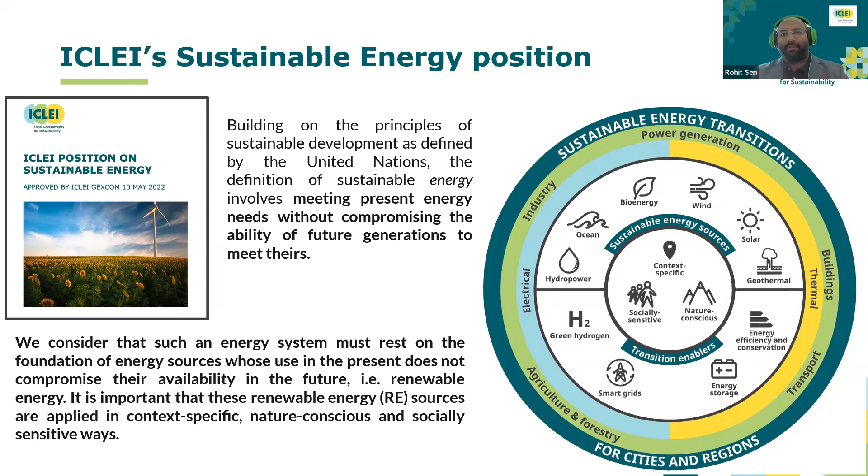We already have seen the sustainable energy is the cornerstone for most of the initiative and activities that is going around for climate change, the climate crisis, whether it is Race to Zero, whether it is talking about the SDGs, whether it is the green recovery, we mentioned net zero emissions, and so on.

It is the most important thing for decarbonizing various sectors. Most of the climate solutions, climate problems have energy in them. So sustainable energy solutions need to be at the heart of the climate solutions.

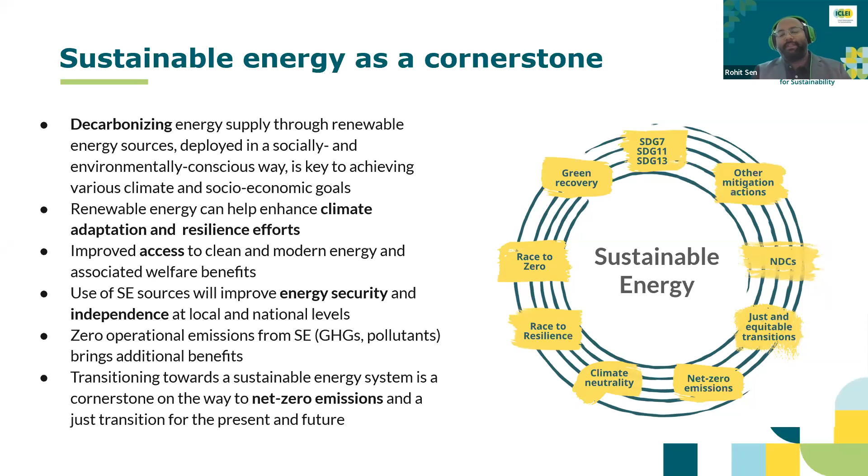We can also see with renewable energy, further climate adaptation and resilient efforts can be made. Moreover, it is bringing in energy security and independence at national and local levels. And not to mention that transitioning towards a sustainable energy system will overall achieve the climate neutrality and net zero emissions that everybody is looking at to achieve by 2050.

Next slide, please. At ICLEI, we are looking at how to achieve this through our climate neutrality framework, which is embedded in the Green Climate Cities program, where we see as the entry point to be the resilience development, then addressing the climate adaptation, resilience, and mitigation through a stepwise customized guide for all cities and regions, which looks into the main 3 steps of analyze, act, and accelerate, which opens up further into 9 steps of how these can be implemented, planned, and further accelerated.

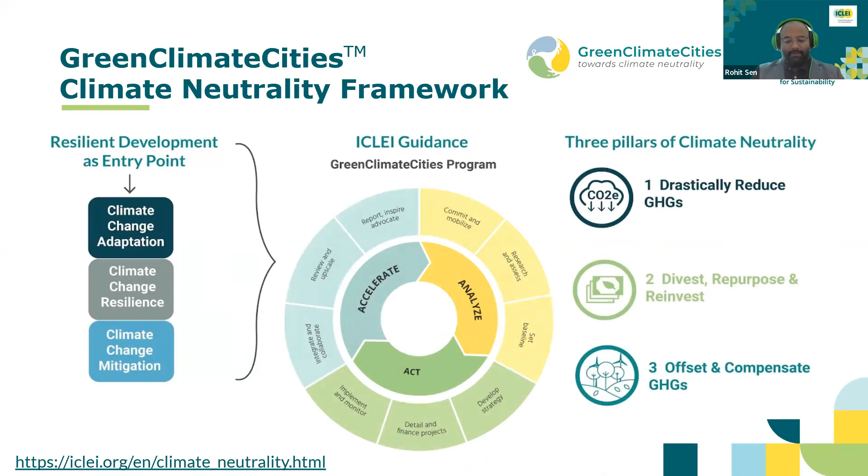The climate neutrality framework further depends on 3 pillars that we have, which is first looking at how drastically greenhouse gases can be reduced, how further divestment and repurpose and reinvestment can happen, and third, offset and compensation of greenhouse gases. Can we go to the next slide, please?

From our perspective, local action is critical, because local governments and municipalities are uniquely positioned to understand what is needed on the ground with local citizens and the population, and can understand the pulse. They are best positioned to look at local targets, whether public transit, building heat and cooling requirements, or energy efficiency codes. They can also support other actors, including national government and stakeholders, in attaining clean energy resilience, enhanced climate action, creating local economy, and helping national and international commitments.

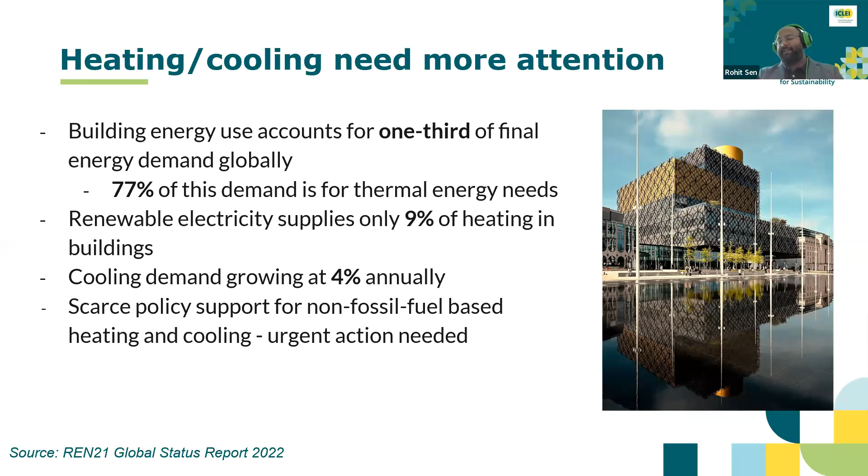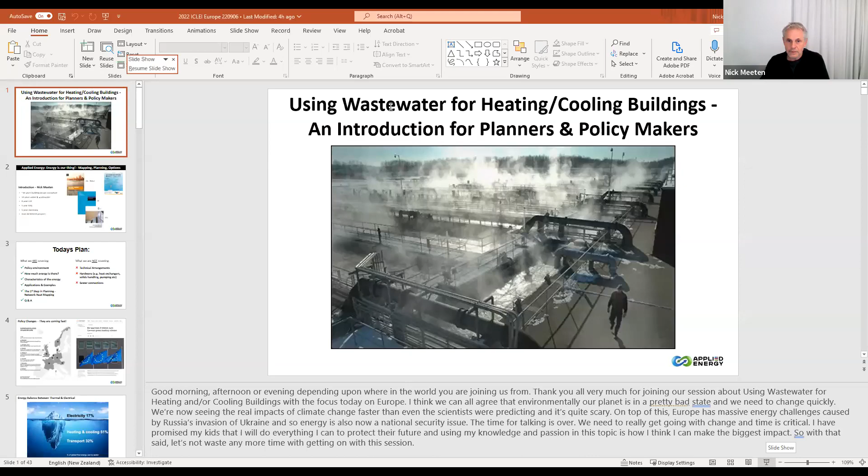I'll just share my screen. All right, wrong screen. Hopefully you can see my screen now. Yes, thank you.

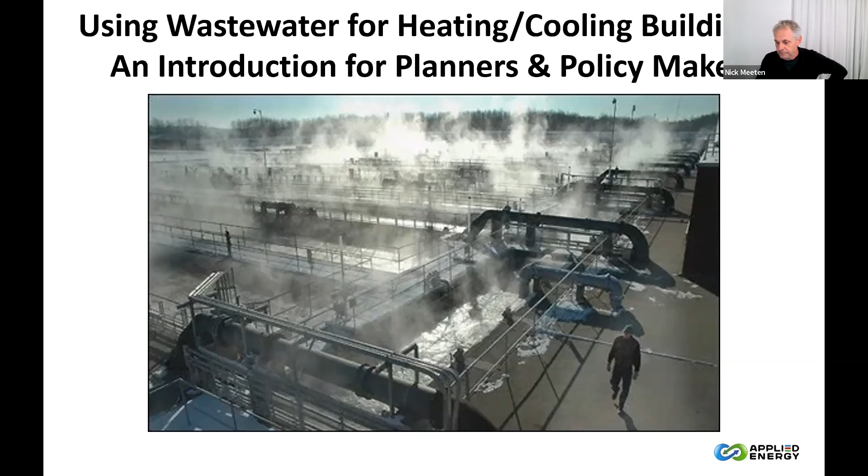Let me introduce myself. I'm a mechanical engineer and I've spent over 25 years designing heating and cooling services for commercial buildings, over 14 years working with water and wastewater, and bringing these different sectors together under the common umbrella of sustainability. I've lived and worked in different parts of the world, including many years in Europe, and I've been involved in over 80 wastewater heat recycling projects worldwide. I'm a director of Applied Energy, a small company specializing in this unusual niche of wastewater heat recycling, and we're very passionate about it.

It's an unusual topic, and there aren't that many people working in this weird little niche. So the plan for today, at least in my presentation, is focusing on planning. It's focused on Europe, but I know there are people in the audience from around the world, so there will be examples from outside Europe as well. We're not going to get into the technical side of things too much, so we won't be talking about pumps, heat exchangers, or heat pumps — we're really focusing on the planning aspects.

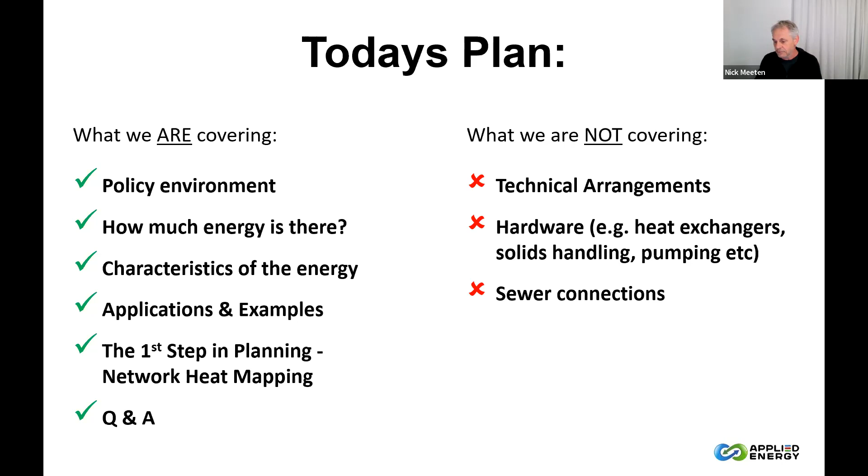So we'll start off talking about policies, and this is a very fast changing space globally. In Europe, new policies are being announced at pretty regular intervals, and sometimes it's quite difficult to keep up. The main trend I see in policies is banning of fossil fuel boilers.

The question then becomes, if you can't heat with gas or oil boilers, where are you going to get the heat from? Other trends are around increasing the share of renewable electricity within electrical grids, and moving to electrification of heat, typically via heat pumps. There's also a policy trend to electrification of other sectors, a very obvious one being transportation, moving towards electric cars, vans, trucks, buses, etc. And with all this electrification going on, there's more competition for electricity, so that's becoming quite an issue.

The last policy I'll mention, specific to Germany, is they've announced 3 billion euros for renewable energy and waste heat-based district heating. They are really encouraging networks to run on 75% renewable energy or waste heat, or for projects decarbonising existing networks. So that's some of the policy stuff I've noticed from Europe.

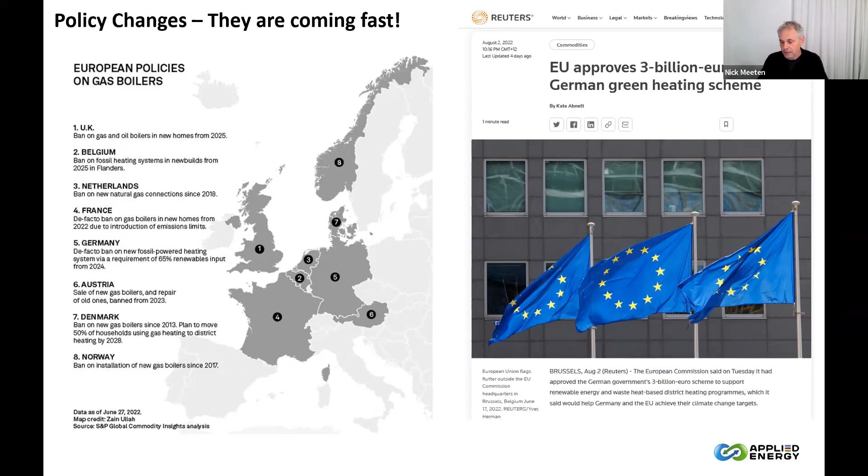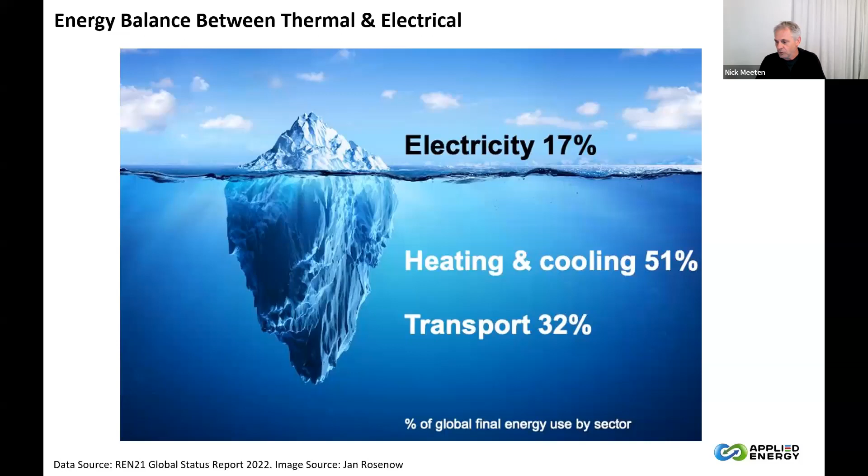Now, if we look at the balance between thermal energy and electrical energy - this is global data from REN21 - we can see that the demand for thermal energy, which is heating and cooling, is actually 3 times greater than the demand for electrical energy. We're talking about 51% versus 17%. And as Rohit mentioned, thermal energy often doesn't get enough attention compared to electricity. I often see on social media people talking about heating and cooling as being the energy elephant in the room. It's really the big one, but it's not getting talked about that much.

If we look at the residential sector within Europe and the energy flows within typical houses - across the EU 27 countries, about 15% of the total energy used in houses gets turned into heat in your water heaters. This is the second largest use of energy in houses after space heating. All this heat energy then flows down into the sewers as the hot water gets used. I'm sure you'll agree that 15% is a lot of energy heading down the drain.

I'd also say this is probably on the low side, because there are other sources of hot water in our houses, such as from cooking - if you boil pasta or vegetables and then drain it, that's hot water going down the drain, but it's not coming from your water heater. Likewise, dishwashers and washing machines often heat water within the appliance, not using hot water from the tank. So all of those heat or hot water sources also go down the drain. So 15% is probably on the low side.

The thing is, heat from space heating gets lost to the atmosphere as it leaks out through the walls, windows, roof and so on. But the heat from hot water is not lost to the atmosphere - it's contained in pipes nicely for us.

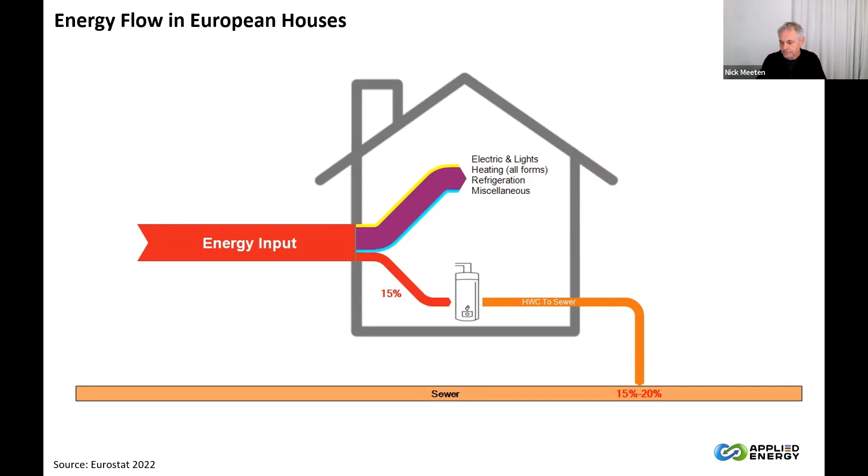If we stand back and look from a wider perspective at a typical city, adding in commercial and industrial low temperature heat on top of the residential sectors, the amount of all this heat that ends up in the wastewater network actually increases to somewhere in the order of 30 to 40%. So in every city, we've got a wastewater network, which is a large collection system of free heat from thousands or tens of thousands, or in bigger cities, hundreds of thousands of houses and apartments, as well as all the commercial and industrial buildings.

Now, of course, this hot water gets mixed with cold water as we use it, we know that. So what we end up with in the wastewater network is a much larger flow of slightly warm water. This water flow contains an enormous amount of thermal capacity for heating and cooling. But unfortunately, currently all of this energy is just wasted and gets flushed away.

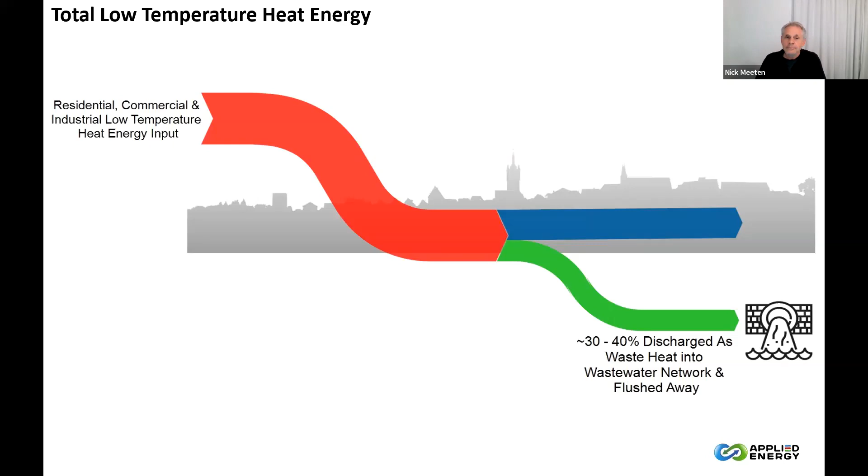So this next map is a filtered version of the one that I just showed you, because this shows, bearing in mind how critical time is, the really easy ones that could be implemented very quickly. This map filters out most of the plants and shows only those already inside or within 2 kilometers of district heating networks. There's still about 4,000 wastewater treatment plants that fit this criteria across Europe.

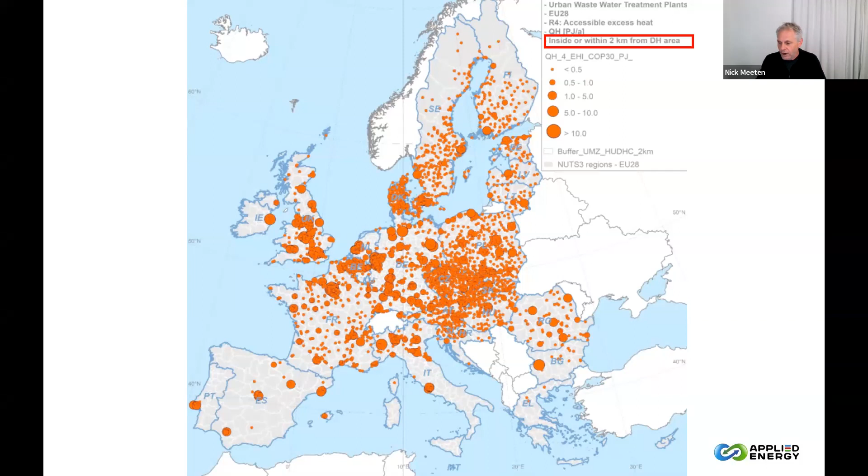And this heat energy is available right now. It's within infrastructure that's already constructed, but it's just being flushed away. These are enormous amounts of energy. The trouble is it's kind of right in front of our eyes, ready to be recycled, but we just don't see it.

So at the moment, we've got all this fantastic heating and/or cooling being flushed away every day in every town and city, but it doesn't need to be. So the idea we're discussing today is just don't waste it. Capture the heat and recycle it while it's still in the city where it's needed.

This thermal energy can be used instead of fossil fuels to heat buildings or industrial processes or for district heating. And so it brings down the carbon emissions. It's also using the wastewater infrastructure for a second and actually higher value purpose than just moving wastewater out of town. It's using the wastewater network as an energy source.

And as the price of other energy sources climbs, which is happening in Europe quite dramatically at the moment, the value of the energy flowing through these wastewater pipes rapidly becomes more valuable as an alternative. Energy can be sold, we all know that. So energy recycling also fits with the concept of a circular economy, which is rapidly becoming adopted as the way forward to become sustainable.

And sometimes these things are overlooked because they're right in front of our eyes. I keep saying that, and that's the case, I think, with wastewater heat. It's right there beneath our feet every day, right where it's needed. We just don't see it. We ignore it and throw it away.

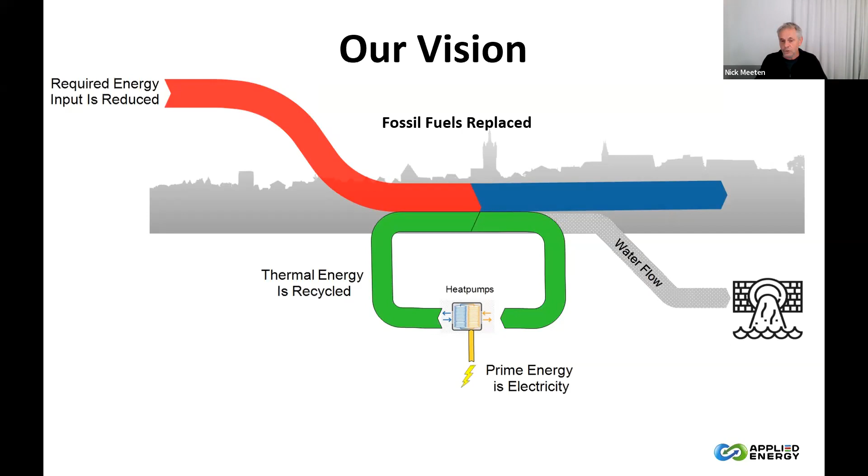So we'll start talking about some of the characteristics of the topic. I'll start off assuming some of you haven't had the pleasure of seeing what flows through wastewater pipes. Wastewater is basically just dirty water. The United Nations officially states that wastewater is 99.9% water. The point is that it's water, and the thermal properties of this fluid are unchanged from clean water.

Its ability to absorb heat, to move heat, to give up heat, are all still the same as clean water. And we know water is a very good conductor of thermal energy, much better than air. So when you're thinking about wastewater, try not to get grossed out. In wastewater we talk about the yuck factor - forget it, get over that. Just think it's water, and the heat is clean heat. Don't worry about the fact that it's wastewater. It's just water, and there's an enormous amount of clean heat energy there.

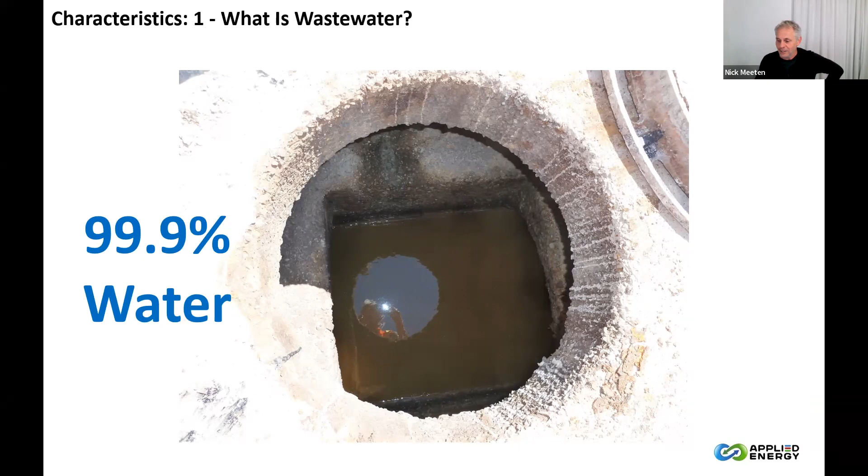What we can see is that the times of day when buildings are occupied and need heating or cooling matches up very well with times of day when there are high flows in the wastewater networks. I like to describe this as saying that wastewater networks and buildings breathe in and out in the same rhythm. That's good for planning because the supply and demand profiles match up. Good stuff, huh?

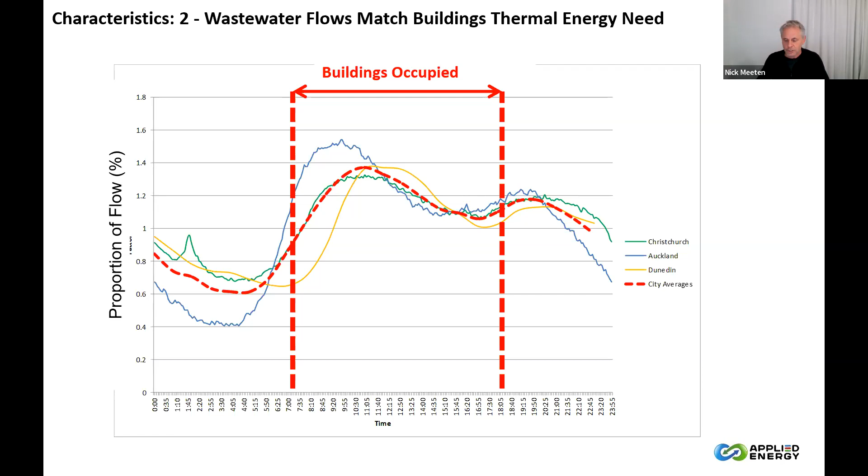Now let's talk about temperatures - another aspect when we're doing planning. This chart shows 20 different temperature data sets for wastewater flows in cities through Europe, the US and New Zealand over all 4 seasons. What we can see is that wastewater temperatures are very stable, relatively neutral. They typically vary within a band of about 8 degrees Celsius over the 4 seasons, and are typically averaging around 14 to 18 degrees Celsius over the whole year.

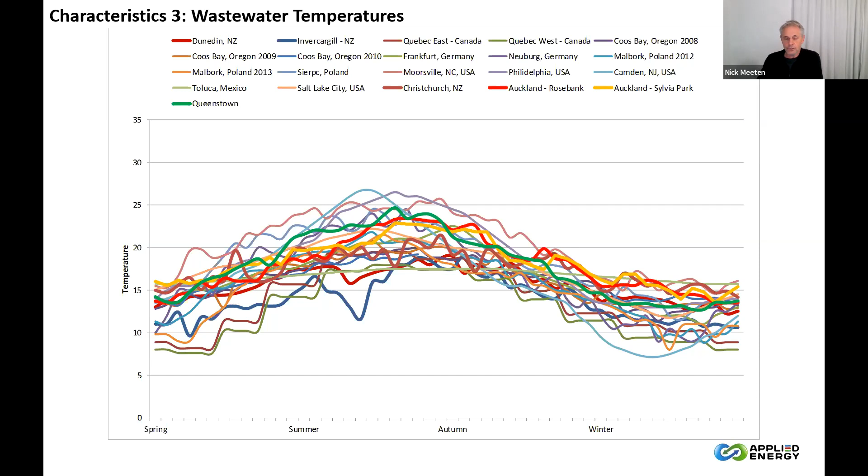That may not sound terribly warm to some people, but when you think that heat pumps can extract heat from air which is minus 10 degrees Celsius, water at 14 to 18 degrees is actually pretty warm. So these temperature ranges are perfect as a thermal source for heat pumps - they work really well.

Right now Europe is just coming out of an extreme summer, and hot weather is just as much of an issue as cold weather will be in the coming winter. Hot weather is driving growth in demand for air conditioning, which typically results in heat being pumped out of buildings and discharged into the air via wet cooling towers or dry air-cooled condensers. In cities, discharging all this heat into the atmosphere increases the urban heat island issue, where the middle of the city is quite a bit warmer than the outskirts. You end up with this heat bubble in the city, which drives demand for even more air conditioning - a growing cycle.

Wet cooling towers consume quite a lot of water, which in times of drought - another issue Europe is having right now - could be used for other purposes. All these cooling methods, wet cooling towers or condensers, use fans to move air. Fans are noisy, so as more fan-powered coolers get installed, noise pollution also grows rapidly.

This slide shows modeling of the impact of air conditioning on the urban heat island profile in Paris, done about 10 years ago. At that time, the thought of twice as much air conditioning being installed as predicted probably seemed like a fantasy. But given the heat waves Europe has had recently, it actually seems pretty probable now. So wastewater offers an alternative place to pump some of that heat instead of into the air.

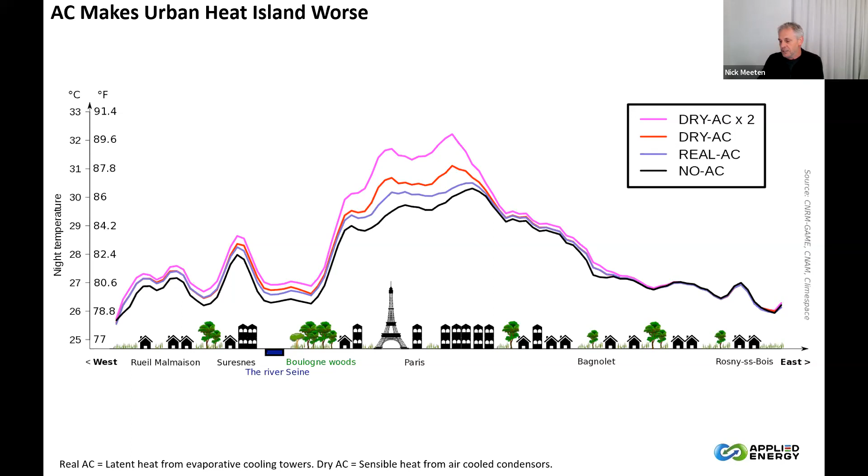What are the benefits? You get water savings from not using wet cooling towers. You can get a quieter city, reductions in urban heat island impacts, and energy savings.

So talking now about temperatures again, this is a comparison between wastewater temperatures and air temperatures. This data is from the city of Christchurch in New Zealand, and Christchurch has a climate which is statistically 97% the same as Paris, 96% the same as Brussels. So not very dissimilar, and the principles I'll show you here apply to most cities within temperate climate zones.

Firstly, you can see how stable the wastewater temperatures are, that's the red line. And that in winter, wastewater is much warmer than air. Equally, in summer, wastewater is cooler than air.

And this predictability and stability around temperatures and flows that I've shown over the last few slides are fantastic qualities for planning. And so they make wastewater really an excellent thermal source for heat pumps, for both heating and cooling. That's why I wanted to show this slide, heating and cooling. It allows heat pumps to operate at very high efficiencies, which means you can heat and or cool a building without burning fossil fuels and using less electricity than air source heat pumps. And that's the win, okay? That's the nub of why we're here. Electrification of heating with very high efficiency with electricity.

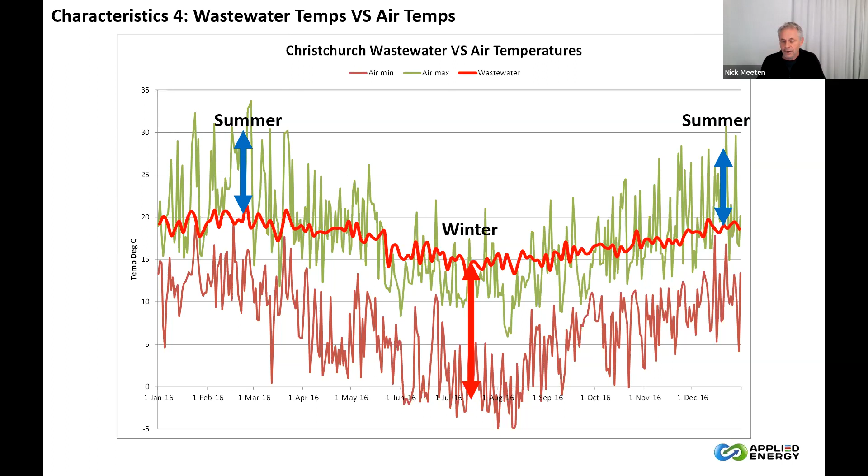So I just wanted to show a case study from the US around electrification of heating. This building is in Atlanta, in Georgia. It's the office building of ASHRAE, which is the American Society of Heating, Refrigerating and Air-Conditioning Engineers. So for heating and cooling guys like me, this is kind of the headquarters of Geekland.

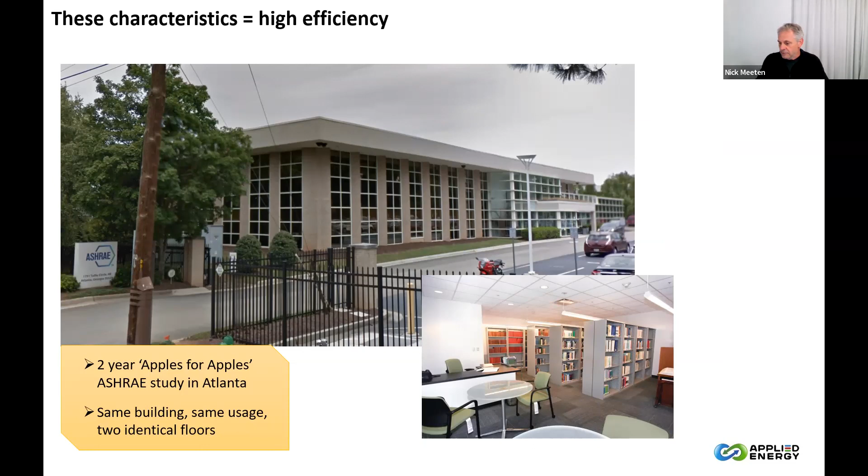It's a pretty standard 2-level office building, you can see that. And some years ago, they decided to refurbish it. As part of this refurb project, they wanted to use their own office as a living lab. So they installed an air source heat pump system on one level and a groundwater source heat pump system on the other level. They installed lots of data loggers, sensors, electrical meters, etc., to monitor everything that was happening. And they operated it for 2 years, gathered together all of this data and analyzed it.

And what they found is that the ground source heat pump system used half of the electricity as the air-based system. So if you're using half of the electricity to do the same thermal job, that makes it twice as efficient. So that's the sort of efficiency gains we're talking about.

Now, admittedly, this one was using groundwater instead of wastewater, but groundwater and wastewater are both very stable in temperature over the whole year. And we know that ambient air is always heading in the opposite direction to what your heating and cooling needs are. So by that, I mean in winter, when you need heating the most, the ambient air is the coldest. But with an air-based system, that's exactly where you're trying to drag heat out of. And likewise in summer, when you need cooling the most, the ambient air is the warmest. And with an air-based system, this is exactly where you're trying to push heat into.

So you're always fighting against nature. And with a stable and relatively neutral thermal source like wastewater or groundwater, you're not fighting nature so much. So you don't have to work as hard, and so the efficiency is higher. And this is why you need less electricity to do the same thermal job.

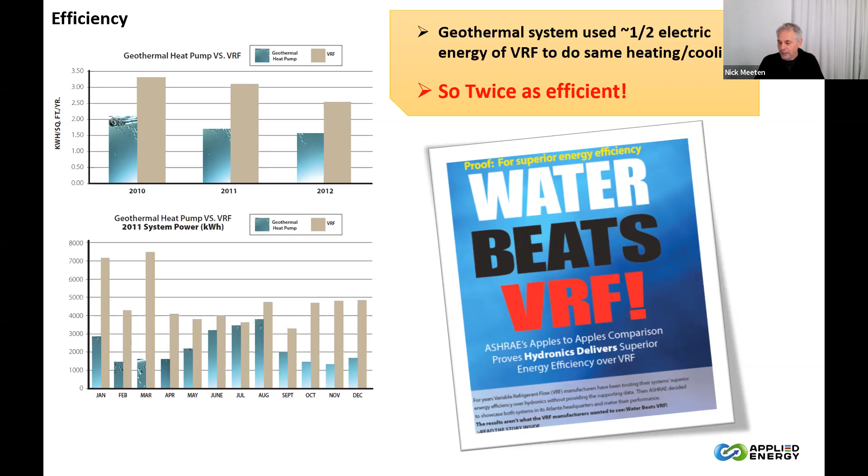Now, while this ASHRAE study is not comparing air source with wastewater source, since wastewater has very similar temperature profiles to groundwater, except that it's warmer due to the hot water energy included, compared to a groundwater source system, wastewater will get better efficiencies in heating mode, but slightly worse efficiencies in cooling mode. But overall, both wastewater and groundwater are much better thermal sources than air source. And wastewater is already in the pipes. One of the things about water sources is you don't need to worry about contaminating wastewater because, as we know, it's already dirty.

Now I want to focus specifically on a specific type of building, which is swimming pool centres. Why? Because these types of facilities are huge consumers of low-grade heat. Even in summer, they need heat. And for many cities, swimming pool centres are one of their biggest energy costs.

Now, hopefully you'll agree that's pretty impressive. I'm not saying we can take this one single example as guaranteeing that sort of performance for all of them. We do have other performance reports from aquatic centres in France, which use wastewater heat, and they tell us that the average coefficient of performance of their heat pumps over 12 months is in the range of 5 to 7. So it is pretty impressive.

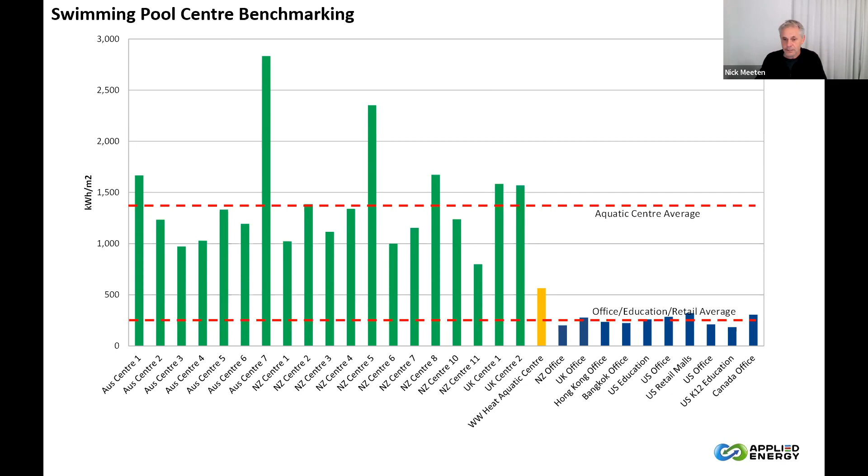Typically public institutions like city authorities often don't want to be the first ones to try something because it might be risky. So the first wastewater heat recycling systems were installed in Europe, actually starting in Switzerland about 30 years ago. My estimate is that there's probably about 1,000 systems in operation around the world.

So these technologies are now starting to become pretty mature. The adoption of them is starting to spread, but from our experience it's generally poorly planned. That's why we're talking about planning today. It's often done, a building here and a building there, but no real plan, and so the best value for money is not being realized.

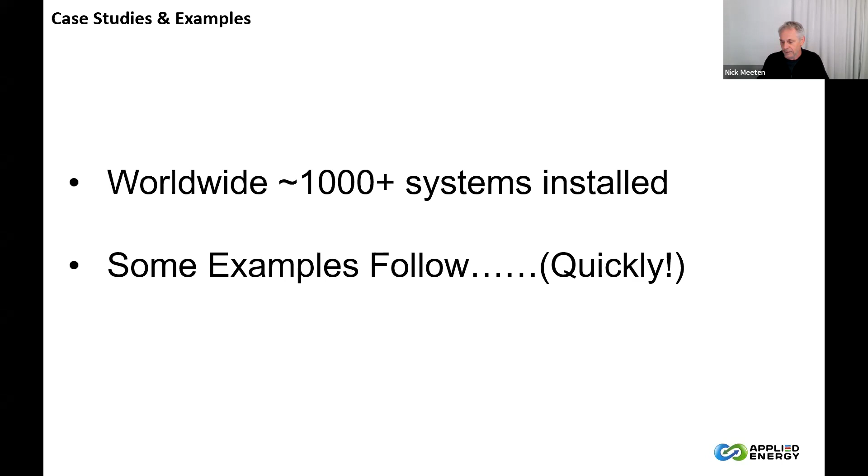So what I want to do now is have a very quick look at a few examples of wastewater heat recycling installations, which I've chosen to span a range of building types, just to give you a feel for where these systems are used. I haven't picked all the fancy ones or the most impressive ones - some of them are really quite ordinary buildings. I will run through these quite quickly, not dwelling on them too long, just to give you a feel for some of the applications in use.

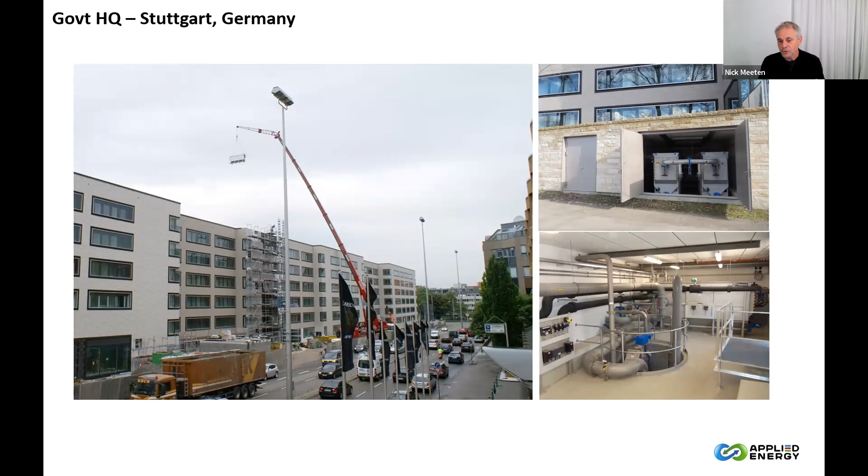So these are clean installations. There's no risk of sewage running all over your floors. We're not pumping sewage through any buildings. It's not dirty and smelly. So there's nothing to be afraid of.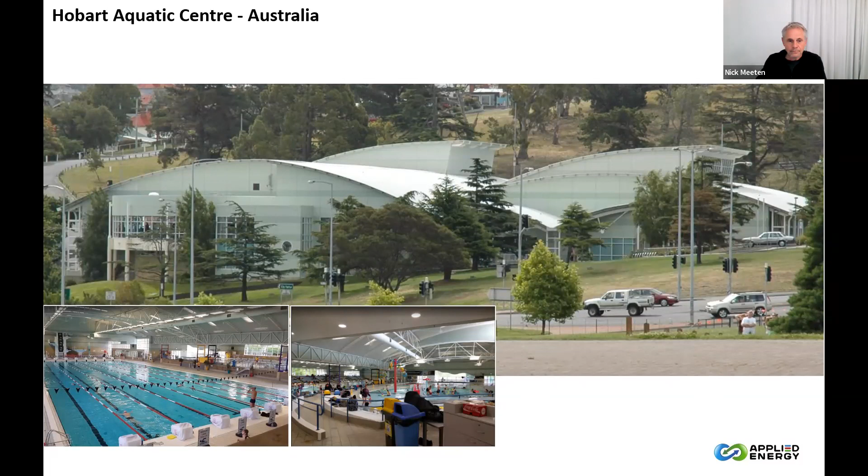Here's a selection of swimming pool centres that are all using wastewater heat recycling. 3 of them are in France - 2 in Paris, 1 in Marseille.

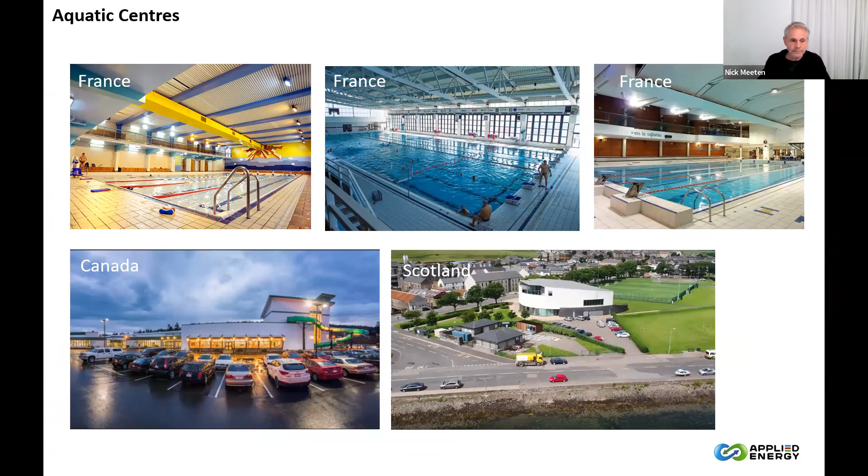Here's one from Vancouver in Canada, called the Southeast False Creek project. This has been in operation since 2010. It's a district heating network with wastewater providing about 80% of the heating. What they've done is tap into a large sewer, which runs across the bridge in the top left corner of the picture there. The red buildings show customers currently connected to the district heating network, with about 3.2 megawatts capacity in that network at the moment.

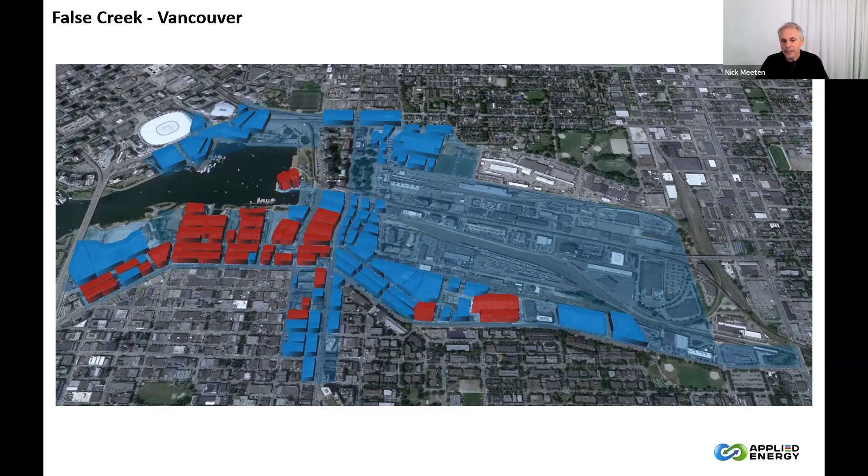The blue buildings indicate future customers who will connect once a 6.6 megawatt thermal expansion project is complete.

This is in the town of Straubing in Germany. 4 pretty ordinary little apartment buildings, which are providing 102 municipality-supplied apartments for elderly people. They're all being heated with wastewater heat. It's been running since 2010.

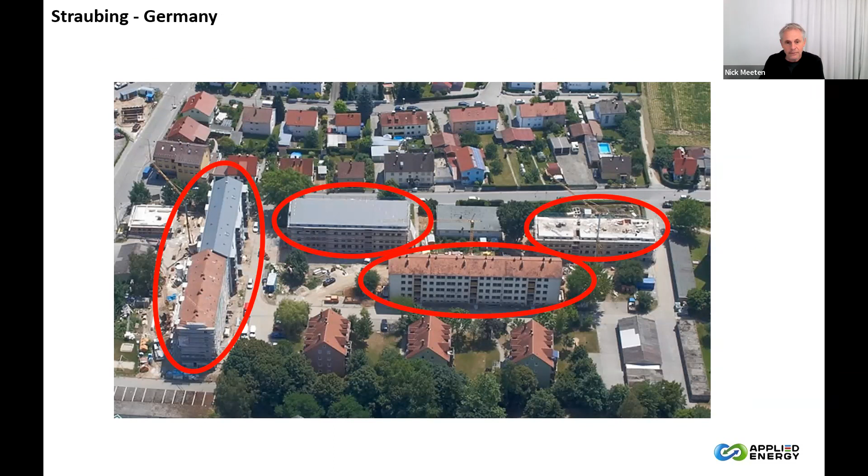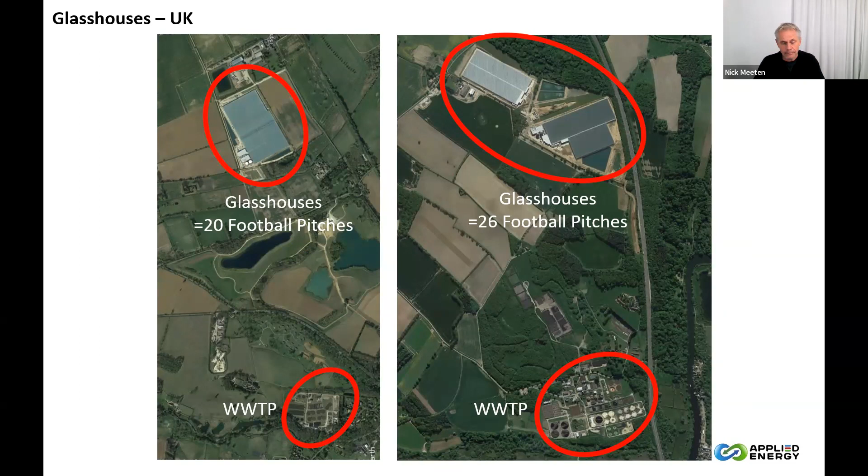Now, this is an interesting one for me. It's from the UK, and there are 2 sites here where commercial glass houses have been deliberately constructed close to the wastewater treatment plants so they can recycle the heat from the wastewater via heat pumps for low carbon heating of the glass houses. And I find this interesting because often the land around wastewater treatment plants is very lowly valued, often because there might be a bit of odor associated with it. But in the future, I think this might start to change when people see uses like this and the thermal energy that's available at wastewater treatment plants.

Hospitals are an excellent match for wastewater heat recycling because they also need a lot of low-grade heat pretty much all year round. This one is in Budapest in Hungary.

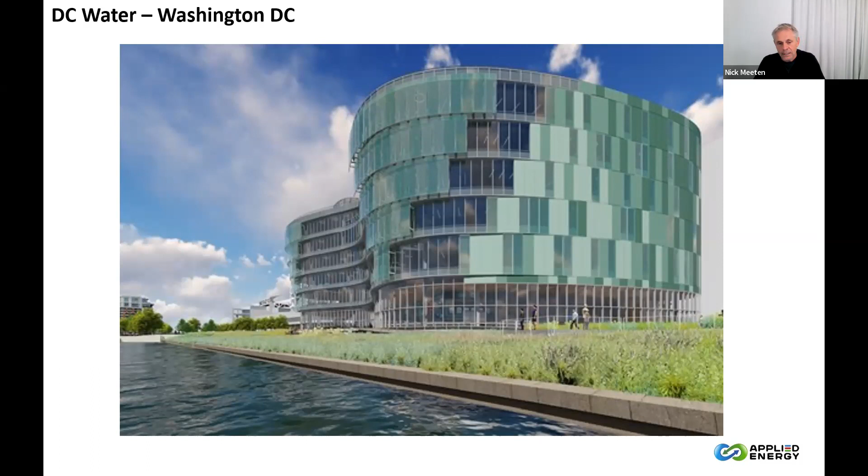Here's one from Washington, DC in the States. It's the headquarters for DC Water. This has been in operation since 2018. It's LEED Platinum. When they were designing this building, they looked at 3 different ways to provide the heating and cooling: one was a conventional air-based system, one was wastewater heat recycling, and the other one was geothermal. They estimated the costs at $700,000 for the conventional system, $840,000 for wastewater heat recycling, $1.4 million for geothermal. And when they factored in the efficiency gains, they said it was an absolute no-brainer to go for the wastewater heat recycling system.

This one's also from Budapest. It's a mixed-use facility comprising retail, hospitality, performing arts, and their municipal council offices using wastewater heat recycling.

One from Japan. I don't know much about this at all. It's been in operation since 1994, and it's a 21-hectare area servicing office buildings, hotels, and commercial facilities via a district heating network.

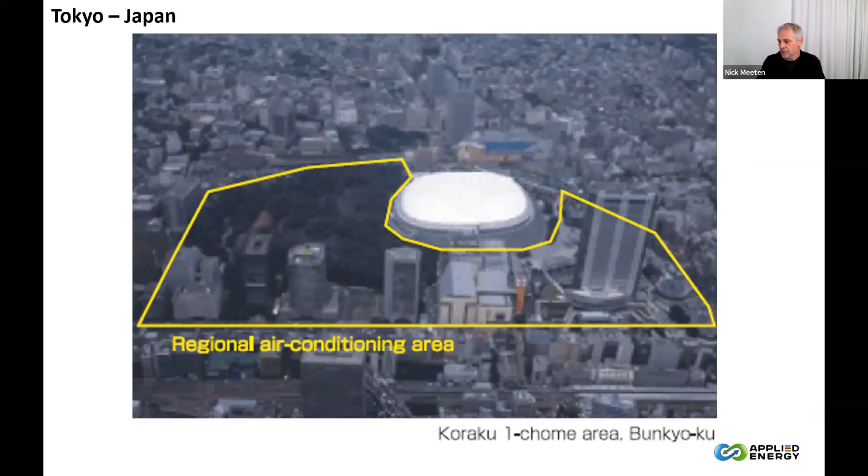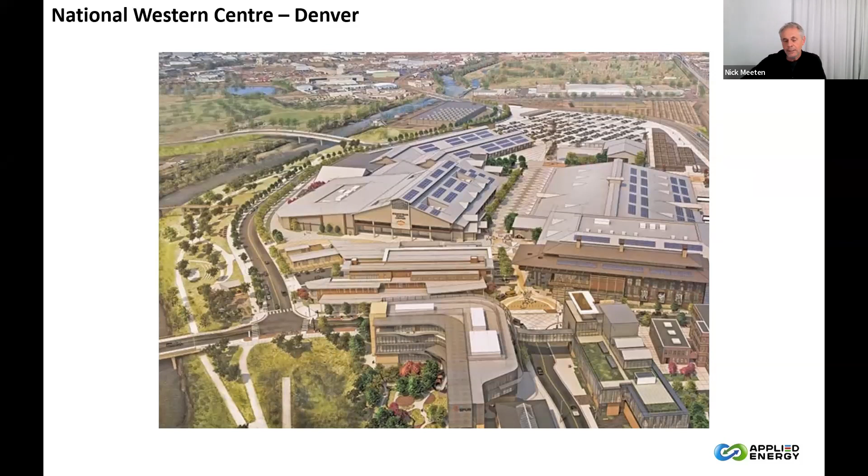Another one from the States. This is in Denver. It's currently in the construction phase, and the wastewater heat recycling system will supply a district heating cooling network for the whole campus of buildings that you can see there. The wastewater heat recycling energy centre is actually finished. It was completed in April, became operational. It's got a 4 megawatt thermal capacity. Another hospital in Toronto, construction of that one has just started last month. When it's completed, it's going to be one of the biggest ones in the world with a 17 megawatt thermal capacity.

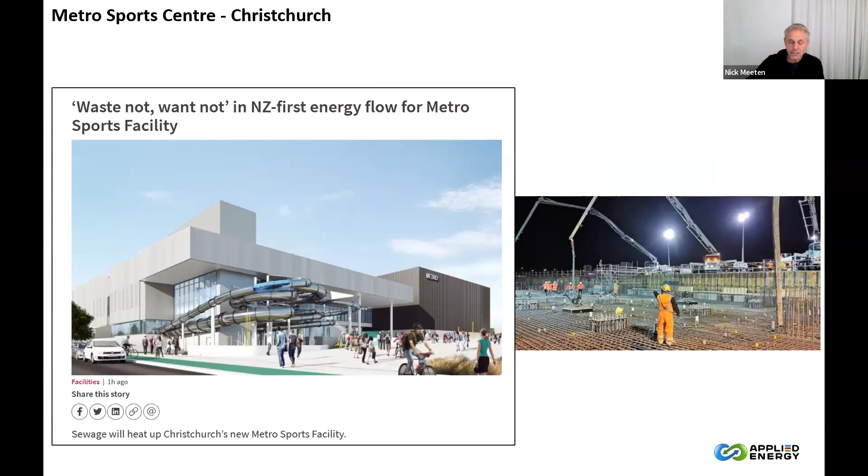Here's one here in New Zealand. It's our first one in construction right now. It's due to be operational in about 6 months. It's a large aquatic centre with a 3.5 megawatt thermal capacity.

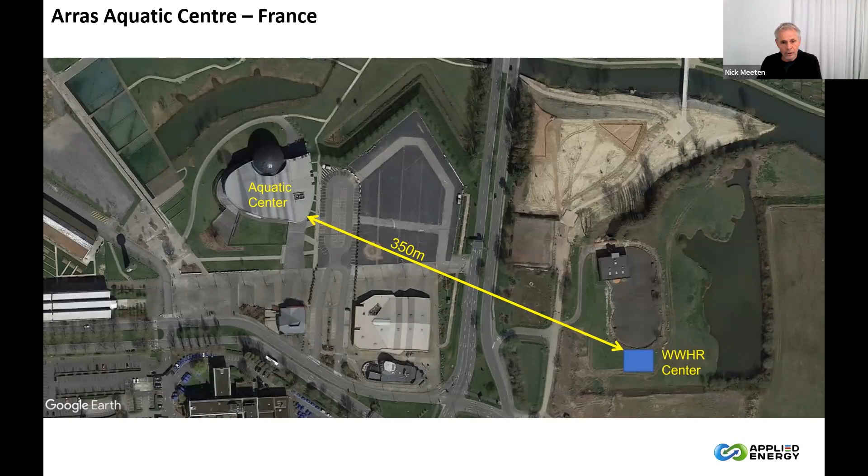Just to give you a feel for sometimes when things are not located directly beside each other, here's an aquatic centre in France. The wastewater pipe is 350 metres away from the building, but that's no problem. They've got the wastewater heat recycling centre there where the blue box is, and run some pipes over to the building. And a similar one in Canada, where they've got the Panorama Recreation Centre there on the left side.

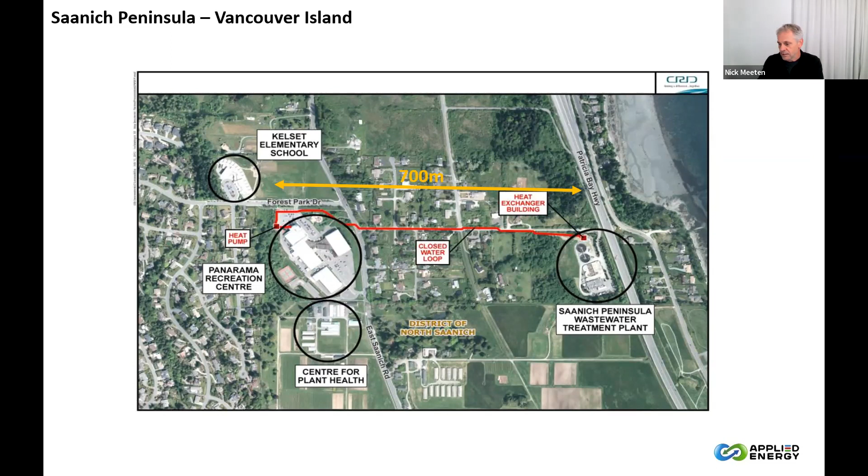The wastewater treatment plant is 700 metres away. They've put heat exchangers at the treatment plant. They've got a closed water loop over to the building with heat pumps there. And they've designed that system to allow for future expansion upwards to the school, just to the north there, and just to the south of the aquatic centre to like an industrial site there. So that will, I guess, eventually have a little precinct scale district energy system.

In Scotland, there's a whole business park here that uses wastewater for heating and cooling.

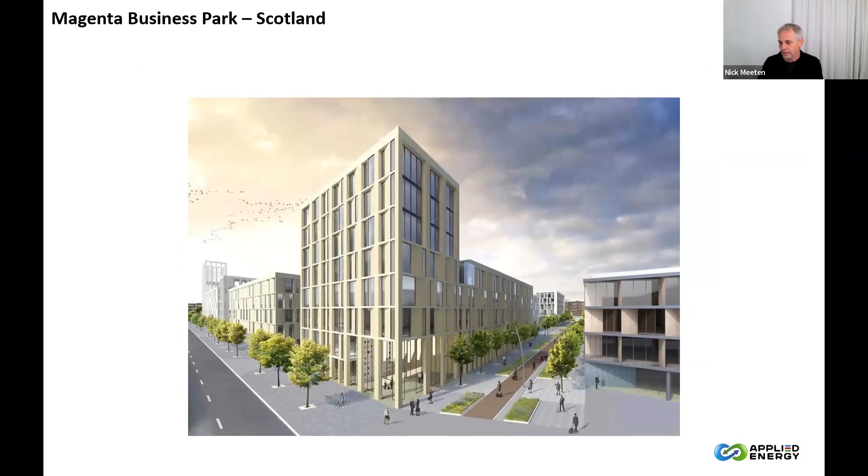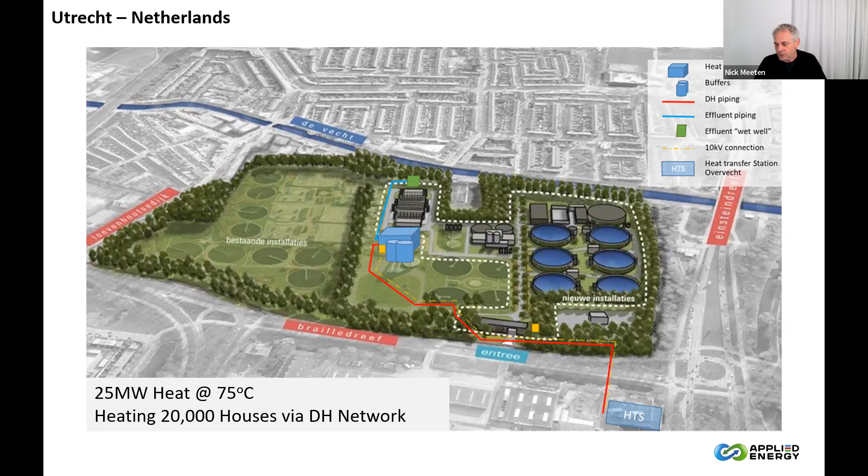I want to also add that district heating networks can also be supplied with wastewater heat from within the wastewater network. It's not always necessary to go to the end of the network at the wastewater treatment plant, but to allow these sorts of things to be planned, the information is needed.

So that's where I want to really start talking about the planning part of it, because that's the focus of today. As I mentioned earlier, our experience is that wastewater heat recycling is generally done in an unplanned way, rather than a city having a plan on how to use this resource. So if we want to start talking about where do we start, if a city is interested, where do they start?

The first step is to actually make this thermal energy visible, because when it's running through the pipes, it's just invisible. Once it's visible, then planners can start to include it in their plans. And we should remember that this heating and cooling source is running right through the city, exactly where it's needed.

Once the mapping's done, ideally the information is made freely available to anyone. And when I say freely available, and this is my personal view, that means something like online. It's not guarded by some city official, because we should remember that the people of the city are donating this energy into the wastewater network every day for free. And I believe that city authorities actually have a moral obligation to their community to make this resource visible.

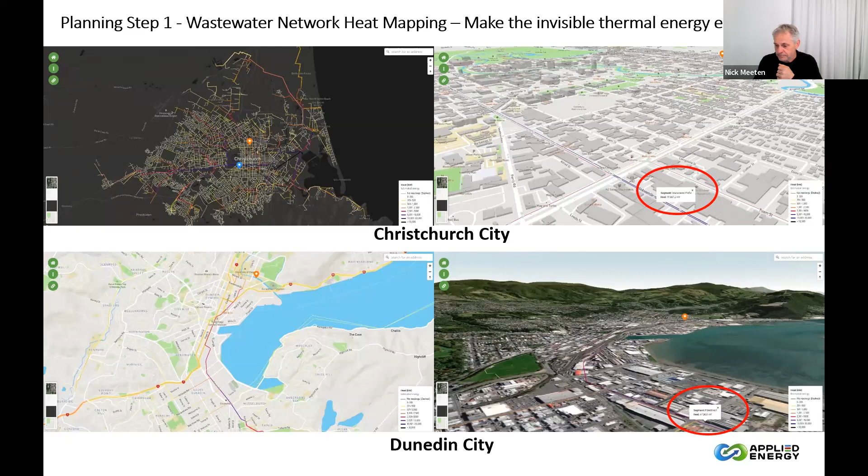So this is the starting point for planning. And this heat mapping service, of course, is a service we can offer. We've done full wastewater network heat mapping studies for 4 cities, and we've done 7 partial heat mapping projects in other cities. So we've got this expertise and the processes and the technology well established now, and this is available to assist any other cities that want it.

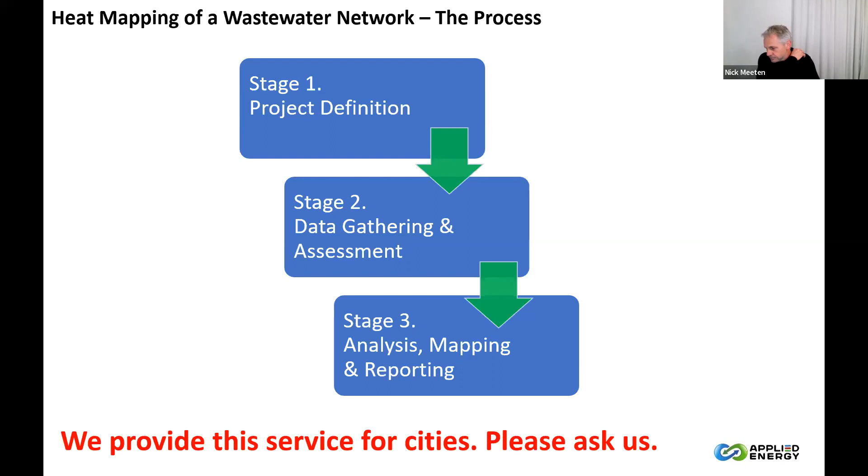Here's an overview of our process. It's a 3-stage process as set out here. Stage 1 takes about 10% of the work. Stage 2 takes about 50% of the work, and stage 3 takes the remaining 40% of the work. So as I mentioned, we've learned how to do this by doing it a number of times now. So we can do it quite efficiently for cities, not only in Europe, but in other parts of the world.

Where does that data come from? So we have to document the criteria that's been used, the assumptions that are made, the risk assessments that are made, the thresholds that are established, because wastewater networks are not an inexhaustible source of energy. They've got a huge capacity, but there are limits. So we have to establish what those limits are.

And the deliverables, apart from all the written stuff, there was also a full map atlas of 25 maps that covered the whole city. As part of our process when we're doing these studies, we can take into account things like where there's urban growth planned, where there might be commercial or industrial developments planned.

We have to look at what treatment processes are used at the wastewater treatment plant, and establish therefore what thresholds there are for taking heat out of or adding heat into the network. But also when we're doing these sorts of things, we identify where there are likely to be very good opportunities for wastewater heat recycling.

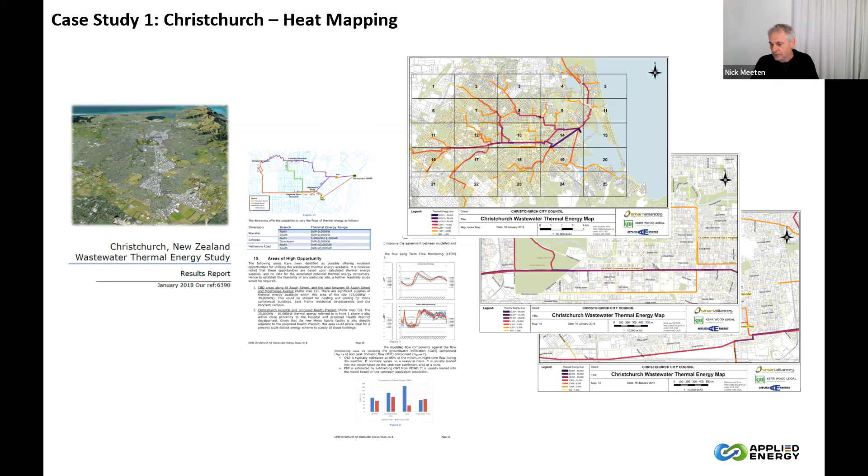In Christchurch, we identified 11 potential sites which would be really highly feasible. Since we did this report, other sites have also come along, but this type of integration into the planning can only happen once the information is available for people to use.

Here's some examples from two other cities where we've done the heat mapping services, Nelson and Dunedin. Now that they've got this information available, it's been incorporated into planning for things like heating and cooling energy options for swimming pools, airport hangars, buildings, schools, university campuses, and commercial offices. It's only because they've got the information available that they can integrate it into their planning. So if you make this invisible energy visible, wonderful things can happen.

So I said before, Applied Energy, we're a small company, but we are part of a global network called the Heat Academy, which is actually headed out of Sweden by Mr. Peter Underberg, who is hopefully watching this event today. So hello, Peter. This network that we're part of, we've got people in 28 locations around the world, most of whom are actually in Europe. So we're here and we want to help.

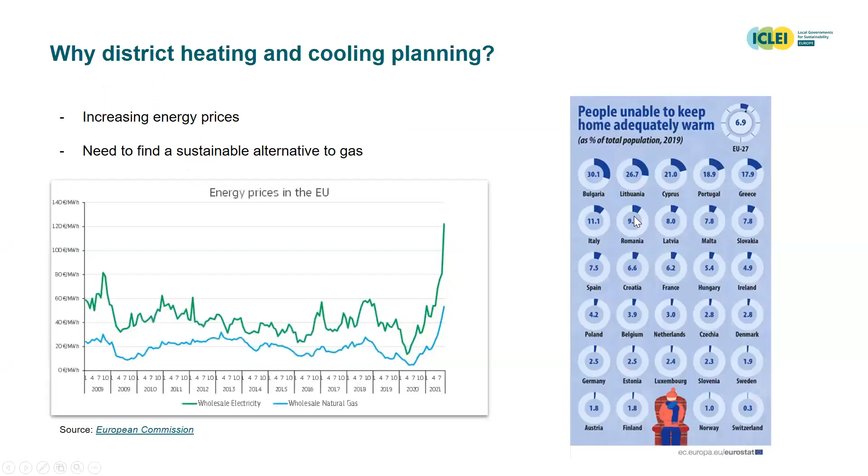Then, I will move directly to why is district heating and cooling planning so important currently in Europe. Well, first of all, as you already mentioned in your presentations before, the increasing energy prices are an issue that we have been tackling within the last couple of years. Prices are rising a lot, and this is not expected to go down any soon. We also have to find a sustainable alternative to the Russian gas after the war that we are having in Ukraine because of the Russian invasion.

Additionally, if we look at some numbers of 2019, the people unable to keep their homes adequately warm in the EU was about 7%, and these numbers are only getting worse with the current situation. Therefore, I would say that this is the perfect time for taking action right now into thermal energy planning because of the high awareness of citizens on the one hand, because of the energy prices, also the sense of urgency and solidarity we have right now with the situation that we are living. So rapid action is definitely needed in Europe.

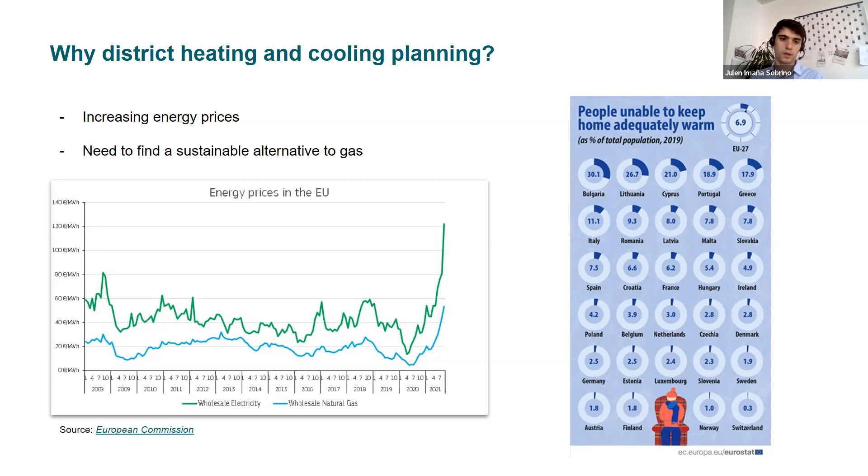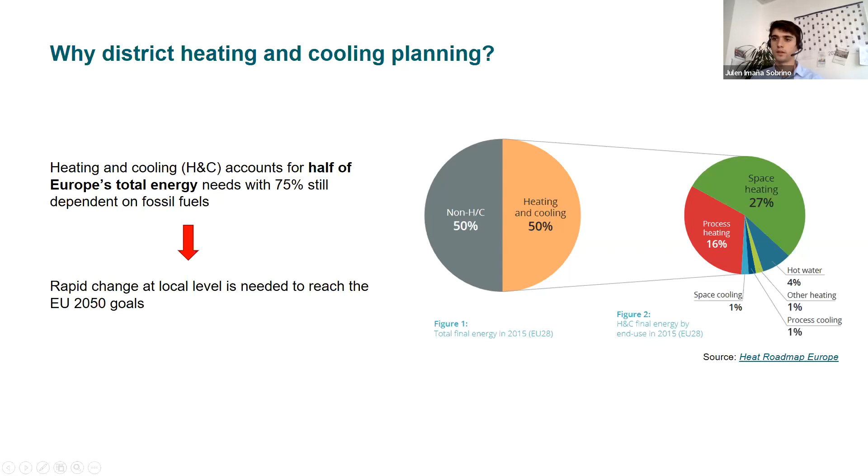You might also know what the Covenant of Mayors is. This is a movement for local climate and energy actions across Europe. They help local authorities develop sustainable energy and climate action plans, also local green deals.

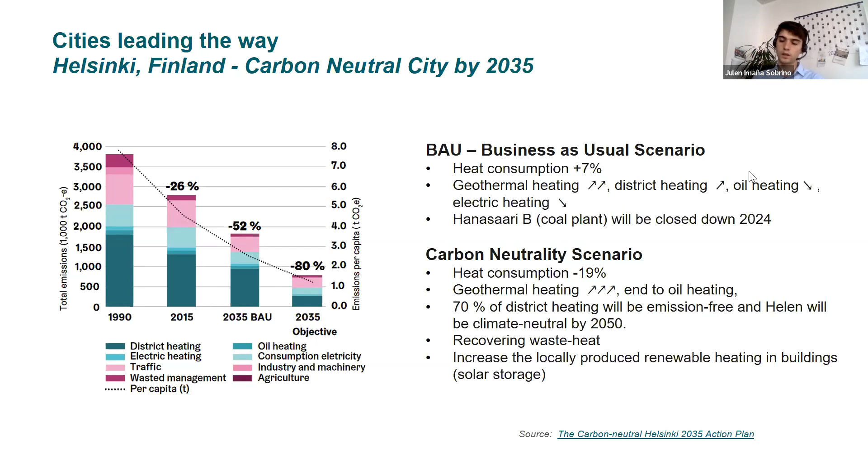If we look at the more ambitious carbon neutrality scenario, they expect to actually reduce, not increase, heat consumption, by 19%, and increase a lot of the geothermal heating. What's very interesting is they want 70% of district heating to be emission-free in the city.

If we see another city in Europe, like Mannheim in Germany, this city wants to be carbon neutral by 2030, even earlier. In their climate action plan they have several goals; first is to decarbonize their district heating system. They currently supply this system 60% with hard coal from a nearby power plant, and want by 2030 to replace this heat supply with river heat, geothermal, and biomass sources.

As you can see, cities are doing very interesting work trying to find innovative and alternative heat sources. And of course, wastewater heat could be a very good option for many of these cities.

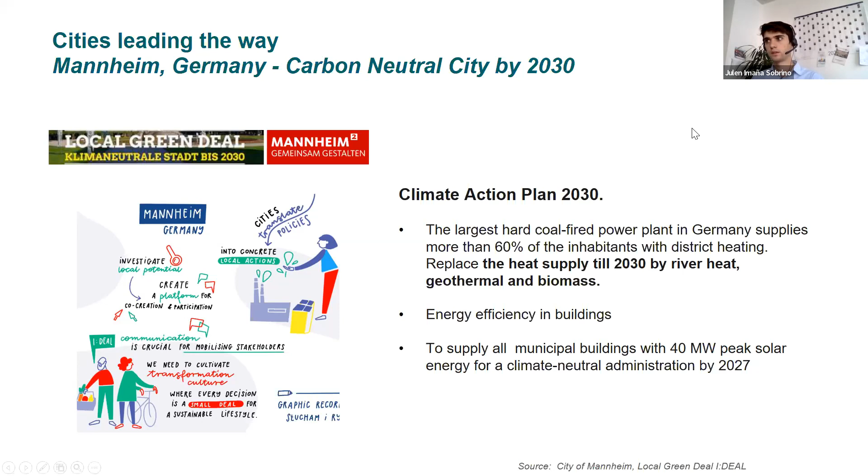The focus of this project was on waste heat for district heating, and they developed several roadmaps giving tips for decarbonization of the heating and cooling sector. Very useful—you can go check it on their website.

We also have the Thermos tool, a project which developed a tool with the same name, Thermos, a free web-based software that can be used for energy planning. This tool can help us design district heating or cooling networks in our city in a very user-friendly way. It can create different network solutions instantly, and I will explain it further later.

We also have the Keep Warm project. This project wanted to accelerate cost-effective investment in the modernization of district heating systems. They developed recommendations for national and local authorities on how to retrofit district heating, and a guidance booklet on how to improve district heating networks. I encourage you to go check it on their website.

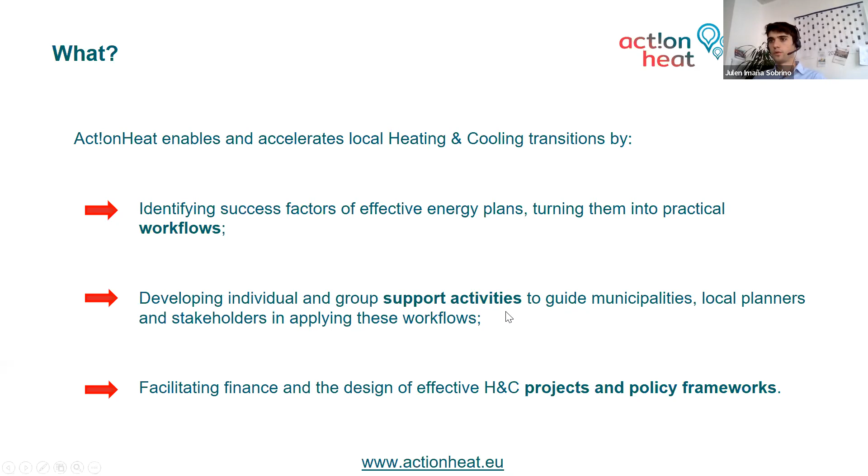As I told you, we are rolling out a support facility in ActionHeat. This support facility aims to support 120 municipalities during the project lifetime. We already started with the first round this year, and we want to help municipalities start, continue, or improve their heating and cooling plans. We also want to focus on 30 pre-feasibility studies for some of these individual projects, and 15 of the projects can benefit from additional performance and financial analysis.

So we encourage all the municipalities across Europe to apply for this opportunity. The call for applications will be open at the end of September this month. You can stay tuned or go to the website and fill in the expression of interest, and we will contact you whenever the call opens again.

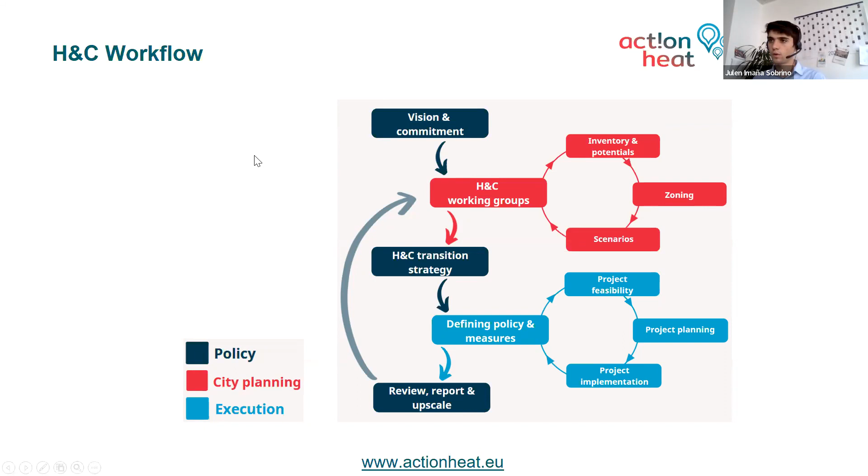Going through the specific steps of this workflow, we start with the vision. This is the first step for decision makers in the municipality to develop a vision and some common objectives on heating and cooling. Then we should create a heating and cooling working group that is officially recognized by the municipality. This working group would have to define some roles and responsibilities. It is also very important to identify all the relevant stakeholders in the area so that we can create a stakeholder consultation group for consultation during the whole phase of the plan.

Once we have achieved this, we can move on to assessing the current situation of our municipality. This is just creating an inventory of the energy demand that we have in the municipality, the supply options, the potential we have in the area for renewable energy or excess heat, wastewater heat could be too. We have a very useful tool that can help us create the inventory and potential.

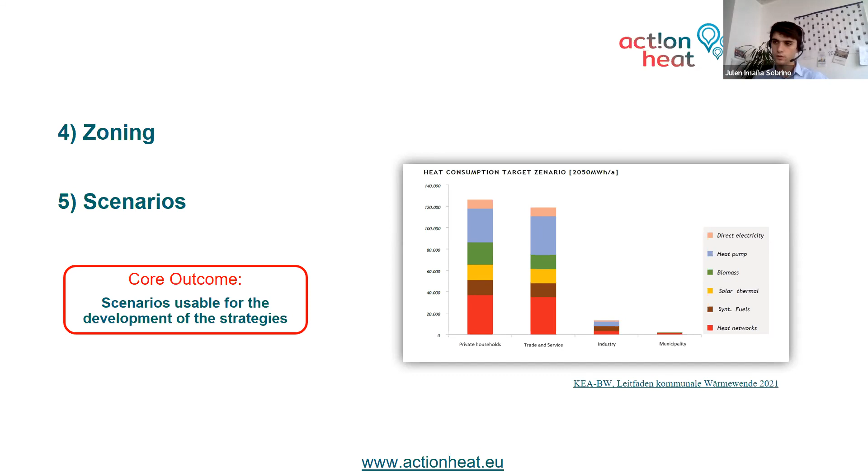With this tool, we can create zones with similar characteristics in the area that need to be supported. We can also create scenarios for the future, for example estimating the demand we will have in 2050, and the increase of this demand, what it would need in terms of supply, etc. So for this, the Hot Maps tool is really useful.

Once we have done this phase, the result will be a heating and cooling transition strategy, a formal plan in the form of a roadmap with some milestones and goals to achieve. From this plan, we can pass to defining specific measures and project proposals to achieve these goals. These project proposals need to have a check on their project feasibility, and for this we are also promoting the Thermos tool. As I mentioned before, this is a tool that is very useful for the feasibility assessment of district heating and cooling networks.

This web-based software can allow us to analyze different supply points in the city and how this could connect to actual buildings, knowing their heat demand. We can create so many different network options instantly.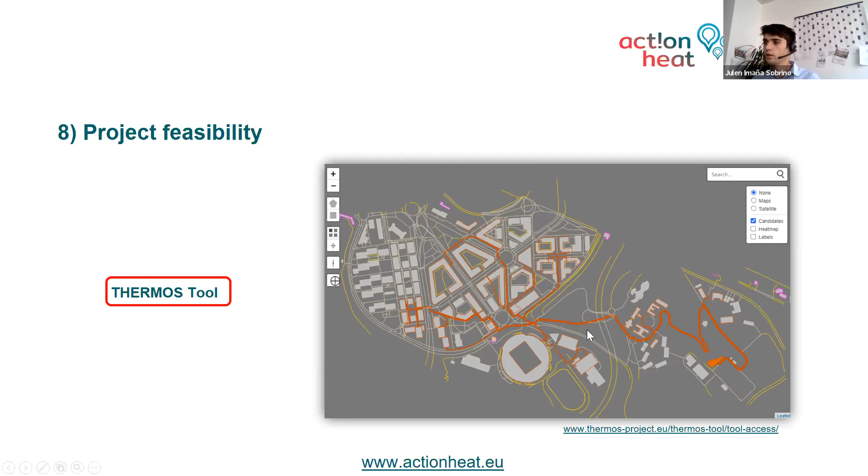As you can see in this example, we created a supply plant on the right side and selected several buildings in the surroundings, and the tool can tell us what are the options to supply these buildings, what pipes we should install, and the actual path of the pipes.

If you decide to put a gas plant, for example, you can also change the emissions per kilowatt hour so that you can adjust the values. Then we ran the model, selecting 13 different buildings to be supplied.

You can see this is the result. The orange parts would be the actual network. The tool also gives us the diameter of the pipes to be installed, and it gives us the total emissions per year that we will have.

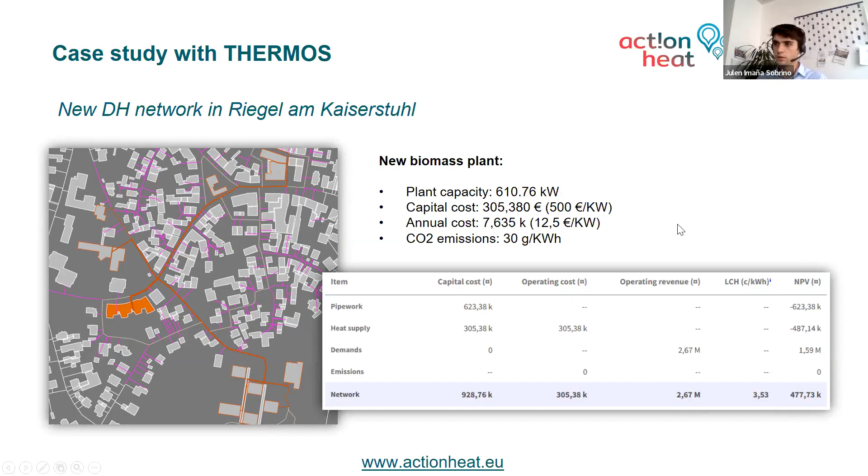Thanks a lot, Julen. That was really good stuff, an interesting presentation. We can open the floor, but before we do that, I have a few questions I wanted to ask you both.

For the first thing that comes to mind as a non-expert, as you guys can tell me and others listening to us, what is that indicator or threshold level where a city can decide they should go ahead with a wastewater heating or cooling network? And should it be for the city-wide level, or for a certain district? Can individuals also see this for their own buildings, as Nick mentioned so many examples, but I just want to know what is that element or criteria that can initiate the process of somebody going ahead with this concept and trying to do pre-feasibility and so on.

My comment to that, Rohit, would be that without people knowing how much heat or cooling is available within the network, it's almost impossible for them to make a judgment. That's the point I was trying to make - there is a resource there, but people don't know about it. And unless they know about it, they can't integrate it into planning, they can't even use it in decision making. So that's really the first step: to make the data available, make the information available.